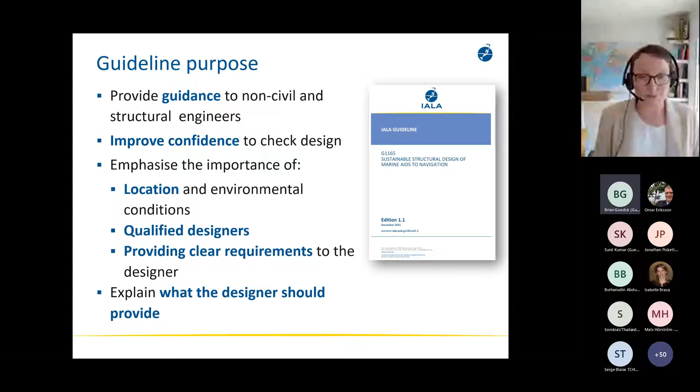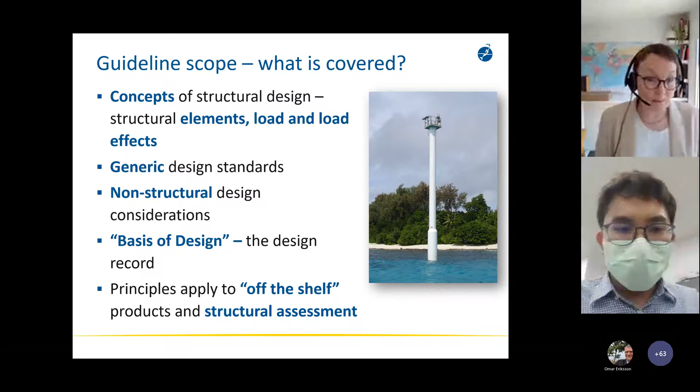And this principle of designing for the relevant environmental conditions applies also to the design of off-the-shelf products, such as, say, prefabricated beacons, as well as structures that require more specific bespoke design. So that's what's covered in the guideline.

What is not covered is detailed structural design calculations, as we've mentioned, because there are so many potential design calculations it would be impossible really to try and combine them into one document, and because they're regularly updated, that would be a really difficult thing to do.

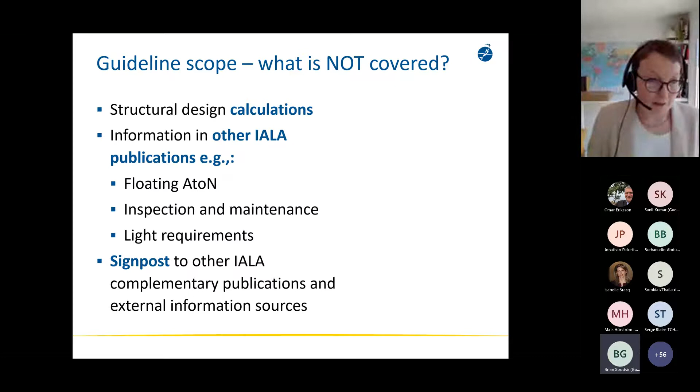So it doesn't include detailed design. It also doesn't include information that's more than adequately covered elsewhere in other excellent IALA publications - so it doesn't include floating Aton, inspection and maintenance, for example, or light requirements, because there are existing guidelines and recommendations that cover that.

What the document does do is act as a signpost to other IALA complementary publications and external information sources. It's also worth mentioning that there's another guideline developed by the IALA Engineering Committee, Working Group 2, led by Jorg, Peter and Mariano, on the effects of extreme environmental conditions on Aton equipment and structures. That document looks at the impact and potential solutions for the effect of heat, cold, water, and wind on the durability of Aton. This developing guideline and G1165 will ultimately complement one another very well, so look out for that over the next 18 months.

That was just my brief introduction to the background, the scope, and the purpose of the guidelines. So now I think what I'll do is hand over to Tiit to give some interesting examples of Estonian fixed Aton and his experience in managing those.

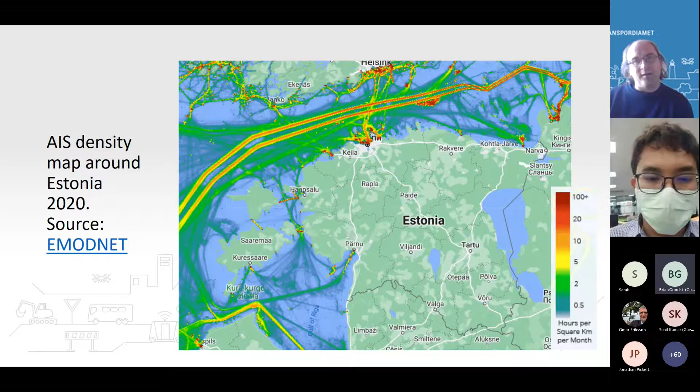Estonia is almost surrounded by the sea from all sides. There is additionally one big lake on the eastern side near Russia, which is also navigable. Naturally, we have quite a long maritime history, which starts with our own Vikings. We don't have knowledge of Atons from that area.

The history of Atons in Estonia starts considerably later and is reflected in our mix of different Atons. Nowadays, there are 321 fixed Atons in Estonia.

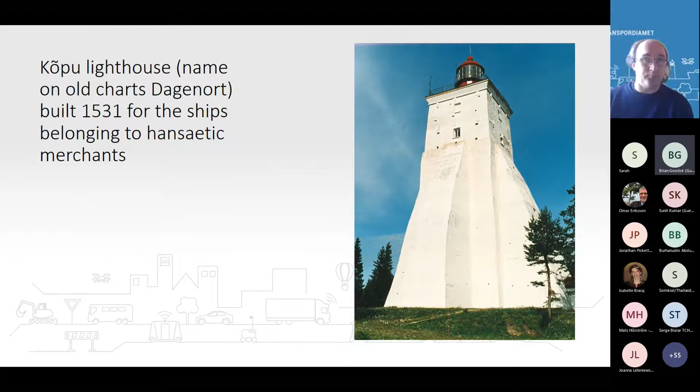The first hard evidence of the Atons is from the medieval period when Germans ruled us. Following Atons are from the time of Russian Tsars. Then the Estonian Republic emerged. Those are the Atons from the Estonian Republic, which was before World War II.

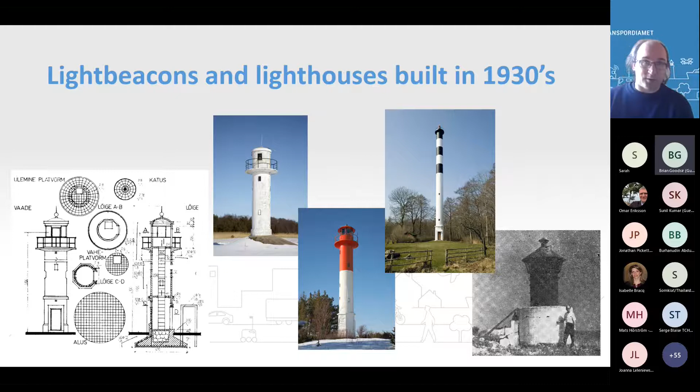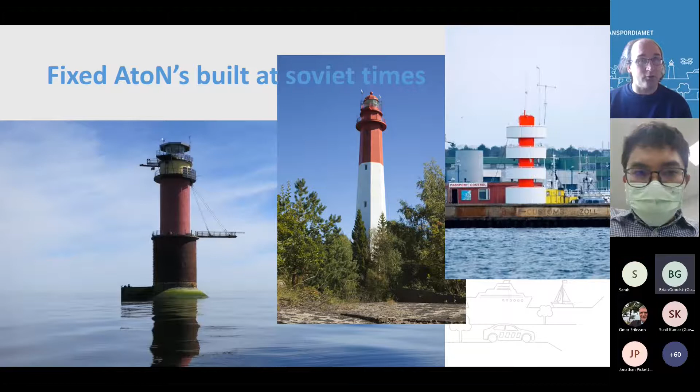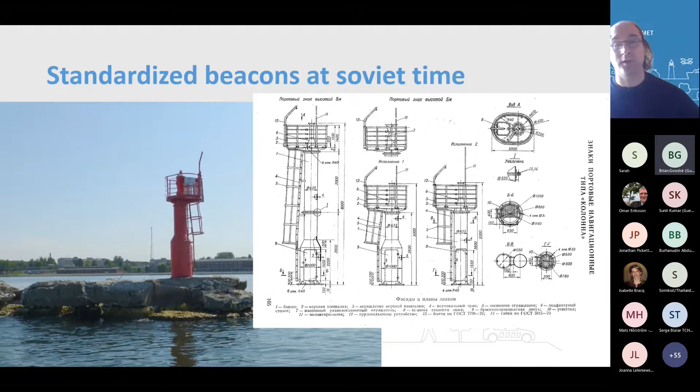At Soviet times, standardized fixed Atons emerged, like this, which was often used at the piers. Bigger ones were used in case of leading lines and as orientational marks. Some were quite big, reaching the height of 40 meters from the base.

Nowadays, we are mostly renovating old structures or building new ones when the cost of renovation would be too high and the structures don't have any historical value. Nowadays, we prefer constructions made of pipes because there are fewer places where water could collect and cause corrosion. Additionally, it is simpler to assemble the construction, weld and paint it.

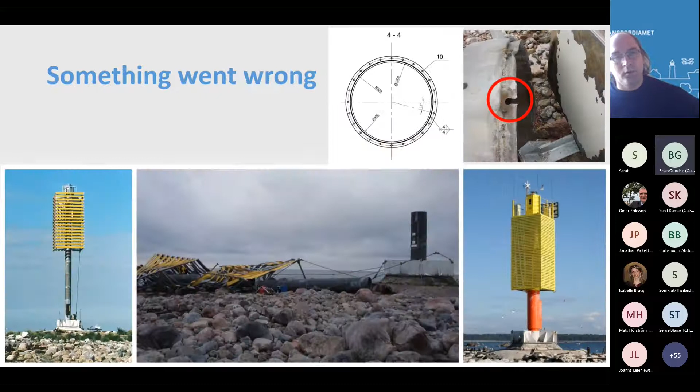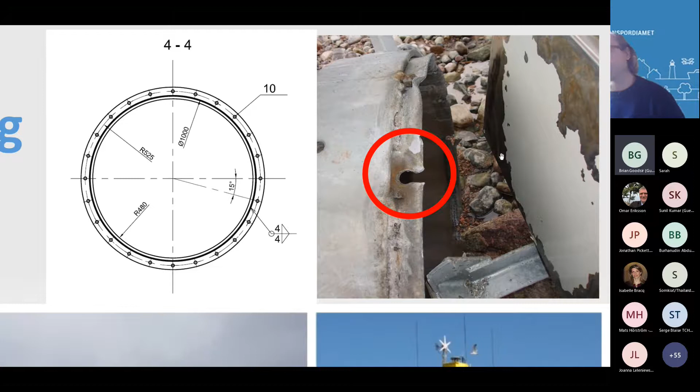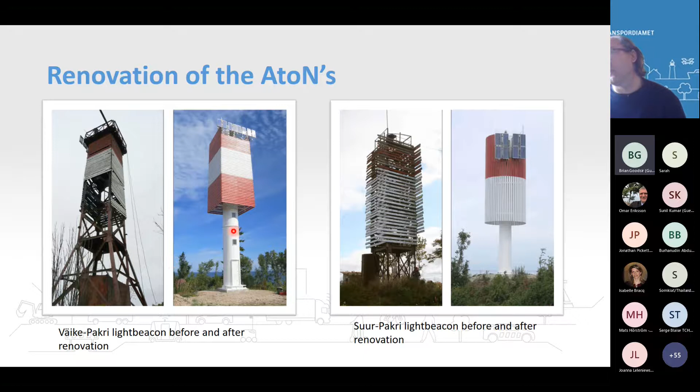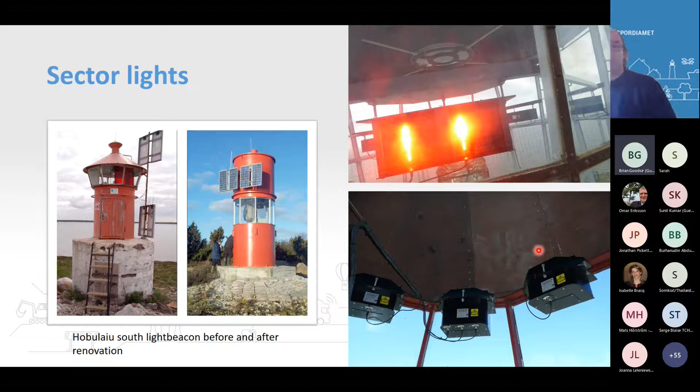Sector lights are quite complicated systems because care should be taken to avoid reflections at the lantern room. Old lantern rooms had tilted windows to avoid such a problem. Nowadays, we use sector lanterns, which consist of separate modules. Those pictures on the right side are from another lighthouse, but I hope you catch the idea.

At simpler cases, our own people are replacing dayboards. This mark is situated in the center of the town, Port Pärnu, and the dayboards are facing southwest direction.

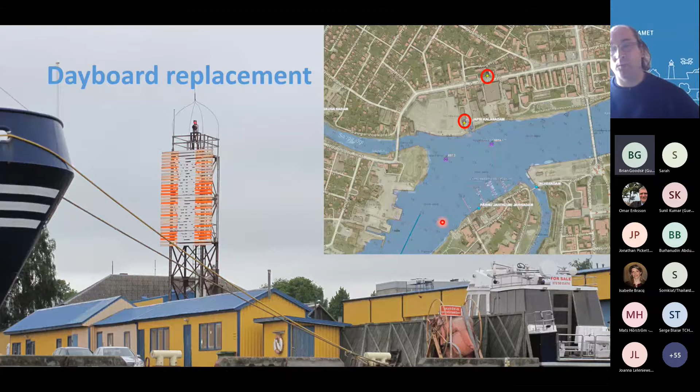The problem was that the color didn't last for a long time on those dayboards, so we decided to have a bit different approach, and instead of paint, we wanted to use some kind of film. The film needs a smooth base to make a good bond, and usually they are meant to be glued on metals.

We are having some marks with metal dayboards. Some painted, but in some cases the retro-reflecting film was used, like on the picture at the left. The film had been in place when we were thinking about using film on that mark already for 13 years.

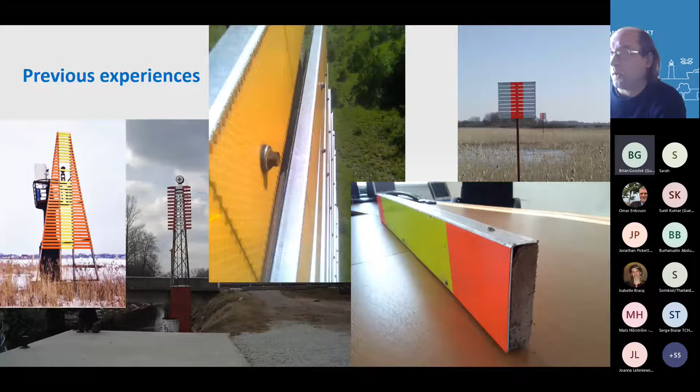Differently from previous experience, as shown on the picture right bottom, we decided to use a rectangular profile, aluminium profile. Here is aluminium, painted aluminium and wood used. But this wood didn't last so long.

Soon we discovered that the aluminium is quite light and easy to use. The drawback was that the designing and preparation process needed to be quite long because we had to carefully measure the construction in order to prepare all the boards.

At the site we only had to bolt the boards. This dayboard, which you see on the picture, took us a bit more than half a day to put in place.

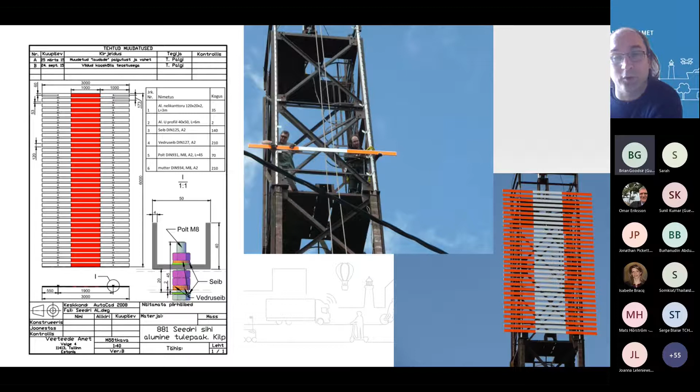As it turned out that this kind of aluminium construction is quite easy to handle with just manpower, we decided to build one two times bigger. In this left picture, you can see bolts attached on the vertical bar of the dayboard. When we assembled this board, we lifted it up on the tower, and then we just had to bolt everything else.

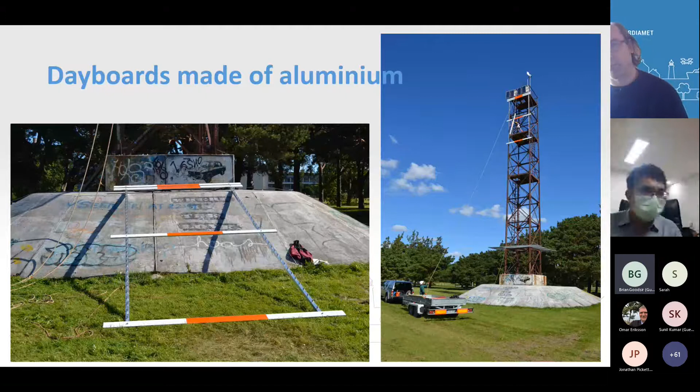Here is shown the front mark before and after renovation of the day board.

That's all from me, thank you for listening. This is my usual work. You can see me in the yellow costume measuring the position of the Aton. Thank you.

Thank you, that's fabulous and really interesting to see how you select the materials and change the design to make your Aton more durable.

So what I'll do now, if I can share my screen again, is just briefly talk through the content of G1165. I'll just talk through the main sections.

Section 4 is the first main section in the document, and that provides a summary in figure 1 of the typical design process. That includes the stages as you work through a typical fixed Aton design, starting with the Aton manager's requirements, such as the focal height of the light, the design life, the materials. It then moves on to look at the design codes that are used.

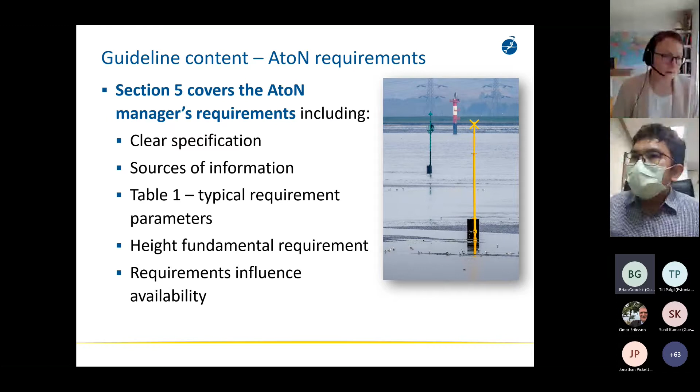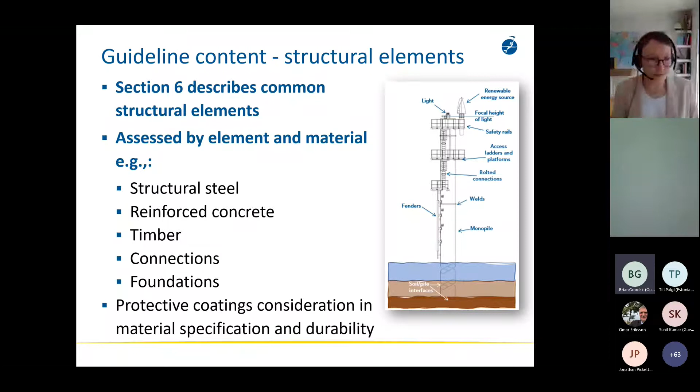Section 6 looks at typical elements of fixed Aton structures that might require design irrespective of the location. Elements are typically assessed on a combination of the part they play in the structural integrity and the material that they're made of—for example, structural steel, reinforced concrete, foundations. The document also talks about how protective coatings are an important consideration when deciding on materials and in the design specification.

Section 6 continues with describing typical loads experienced by fixed Aton, and then section 7 looks at globally generic design standards. Whichever region of the world you're in, there is usually a design standard based on these generic areas of design, such as the principles of design, loading, structural steelwork, piling, timber, etc.

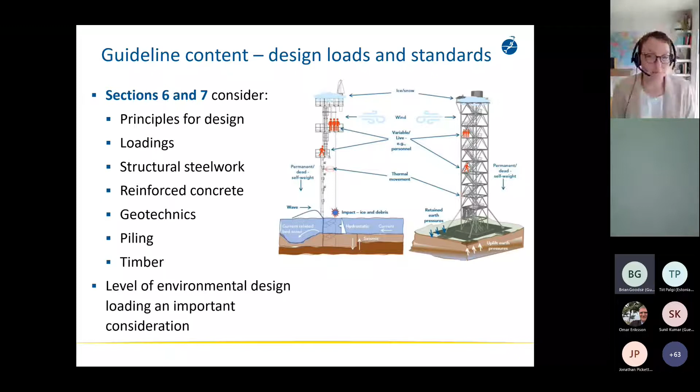The design standards also apply to the assessment of existing structures. Something the document stresses is the importance of considering the concept of annual exceedance probability, which you can read more about in the document—it's a way of describing the level of environmental conditions we want the structure to withstand, as that will affect the cost and the probability of the structure failing or not.

Section 8 briefly covers additional design considerations that can influence the preferred design option, such as durability—the deterioration of material can lead to a loss of load-bearing capacity, for example. It considers sustainability, the whole life cost approach—do we want to design for an average year weather-wise or an extreme year? Is it more cost effective longer term to build a more robust structure rather than risk replacing a cheaper structure once or even twice over the same design life?

The document looks at waste reduction and waste management through the design. It considers stakeholder requirements because they can also influence access and operation—can the structure be accessed and maintained safely? And similarly, how does the design allow or minimize the potential for trespassing, theft and vandalism?

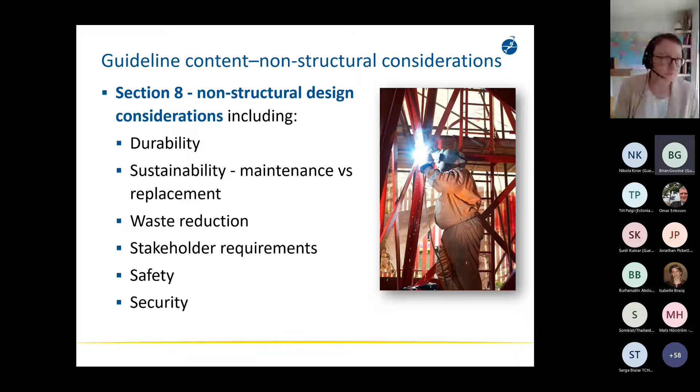Finally, section 9 briefly describes the potential design output that the Aton manager might receive from the designer. That might be specifications and drawings that a contractor or supplier can use to provide the Aton, along with operational manuals to help through the operation of the structure.

There might also be a designer's risk assessment, and there should be a basis of design summary document. That document summarizes what the original requirements were, and what additional standards, references, design parameters and values the designer has used when designing the Aton.

That document is a great opportunity for the Aton manager to check and compare what the design has provided with the original requirements, and also to challenge the designer if items are missing, perhaps using G1165 to help. An example basis of design document is provided in Appendix 1 of the guideline.

So that was a very quick summary of the guideline content, but it basically covers providing the Aton manager or professional with a basic level of understanding about the structural principles of Aton design, the typical design process, and the documents they may expect to receive from the designer.

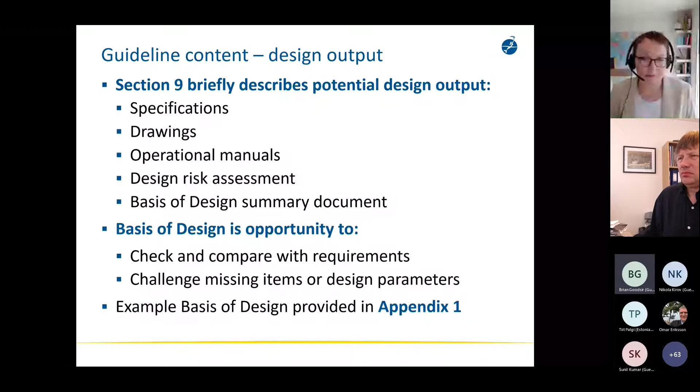Thanks, Sarah. I'll try and share my screen. Can you see that? Yeah, we can see it. Yep, okay. Good evening or good morning, everybody, depends what part of the world you're in.

So I'm going to give a quick presentation with lots of photos based on some case studies on structure replacements. I'm going to cover two different case studies, both from Papua New Guinea. One is for a place called Strathord Island, and another for a location called Delman Front Lead.

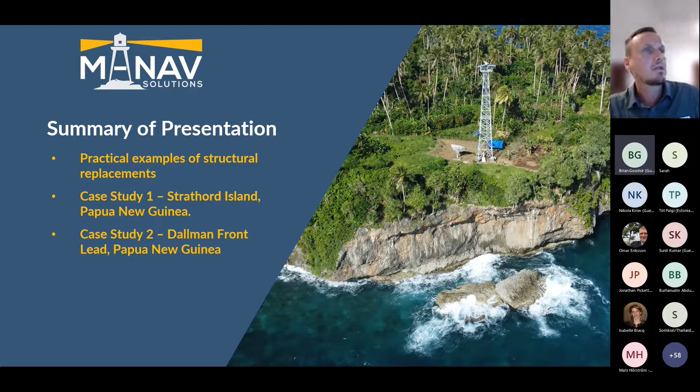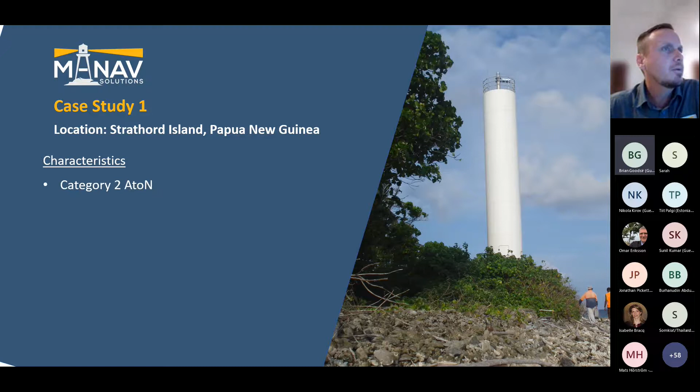So the first case study is on a location called Strathord Island, which is in Papua New Guinea, in the Pacific. This particular site, you can see in the photo on the right. This was a Category 2 AtoN.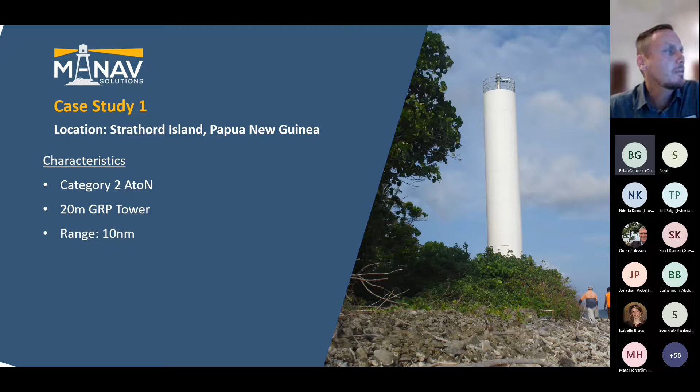The original structure was a 20-metre GRP tower with a 10 nautical mile range. This marks the northern tip of a group of uninhabited islands directly adjacent to one of the main international shipping channels running through PNG coastal waters just north of the Jomard entrance. So the majority of international vessel traffic passes fairly close to these islands.

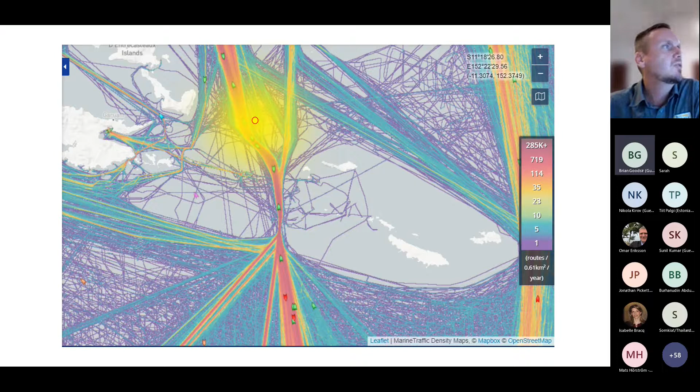So the initial structure was installed in 2005, done to replace an old steel lattice tower that had been there for about 20 years and had deteriorated until collapse. At the time of this job, I was working on the contractor's side, and this particular structure was specified in the contract documentation.

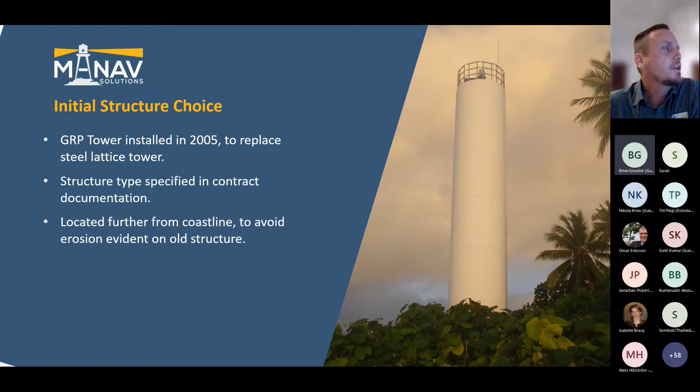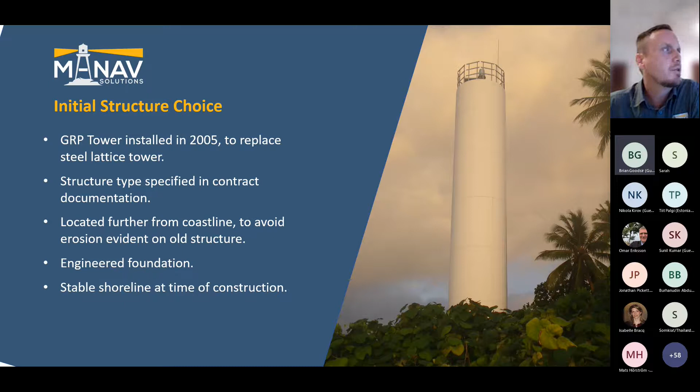It was located as far away from the coastline as we could to avoid the erosion that was evident on the old structure, whose foundation could be seen on the beach. It was quite a big engineered concrete foundation, and at the time we installed it, it was quite a stable shoreline with probably about 20 metres to the coastline.

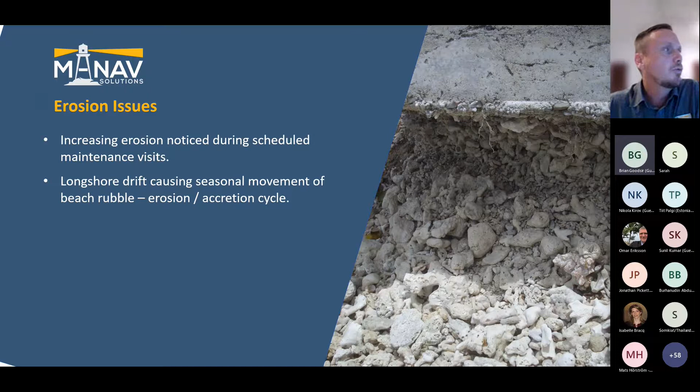Probably about 5 or 6 years after, we started to notice increasing erosion. There was a 6-month scheduled visit to each of these sites, and it was quite evident this was caused by longshore drift, the seasonal movement of beach rubble and that erosion and accretion cycle. So the beach was going back and forth, building up and eroding during the natural cycle.

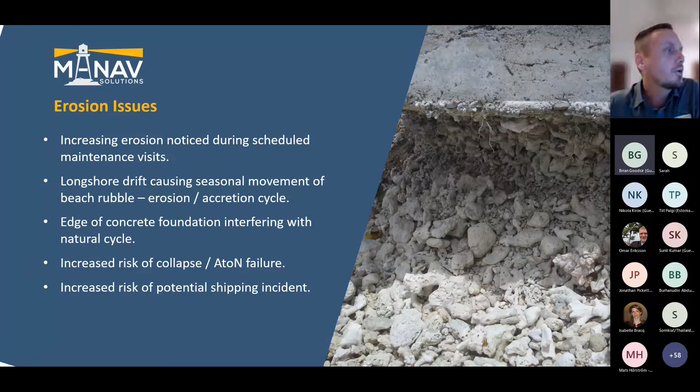But what we noticed happening was that the edge of that concrete foundation started interfering with that natural cycle. So as the beach eroded at a certain time of year, the concrete foundation was causing issues. It got to the point where we were noticing increased risk of collapse or failure, which of course increases the risk of potential shipping incidents due to its location.

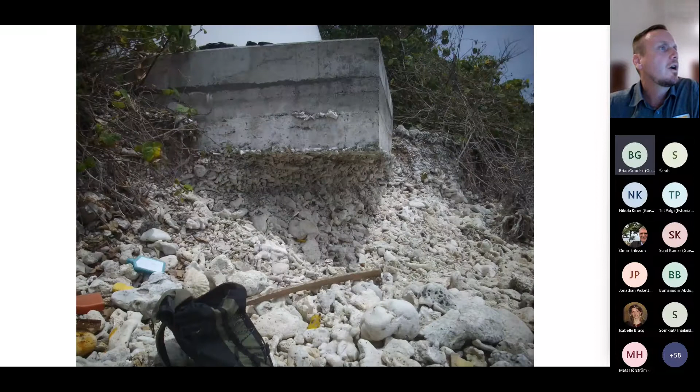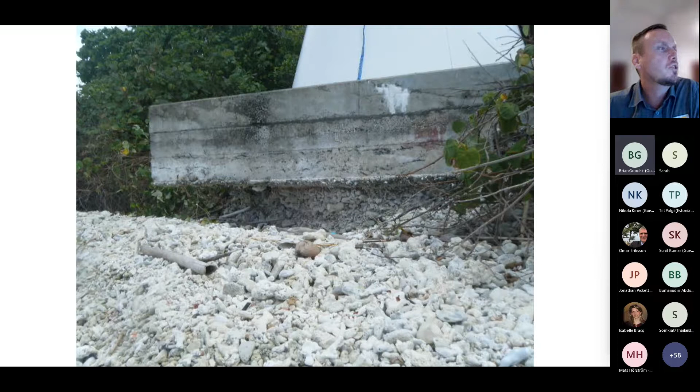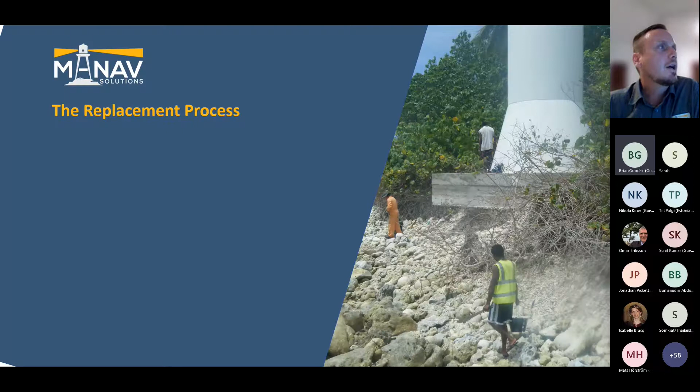You can start seeing how severe that erosion was getting. This was just natural longshore drift, but that concrete foundation was causing issues with the beach hydrology. You can see eventually it got to the point where that foundation was getting ready to collapse, so we were asked to go through the replacement process because the level of risk of failure was deemed too high. You can see that in the photo on the right.

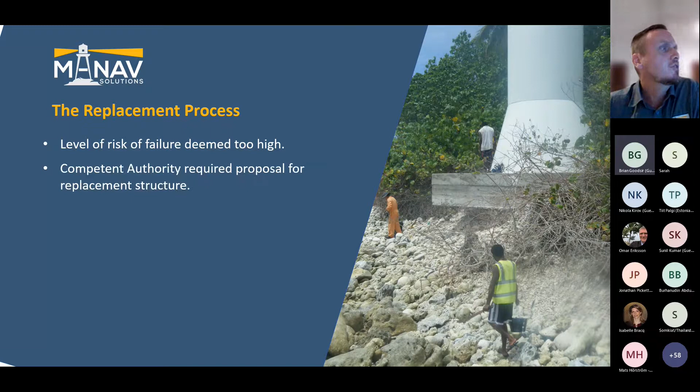The NMSA required a proposal for a replacement structure, and they wanted the lessons learnt applied so as not to make the same mistake of an onshore structure in the wrong position. We didn't have time to do a detailed longshore drift study, so it was not possible at that stage to predict the future sediment movement and shoreline changes, especially with that foundation now there on site.

So it required, and this is part of this new guideline, as Sarah said earlier, a balance of cost and assured reliability and availability. So we had to look at it from several angles.

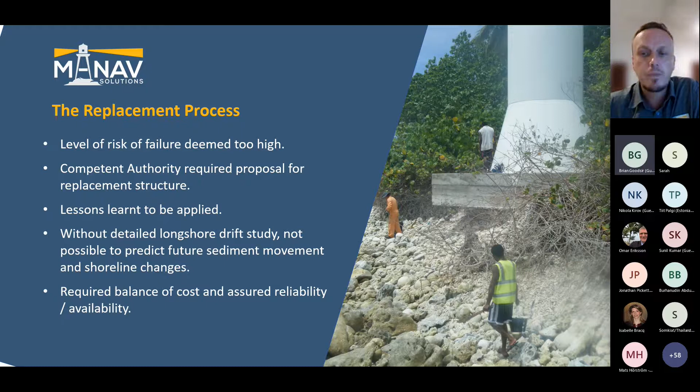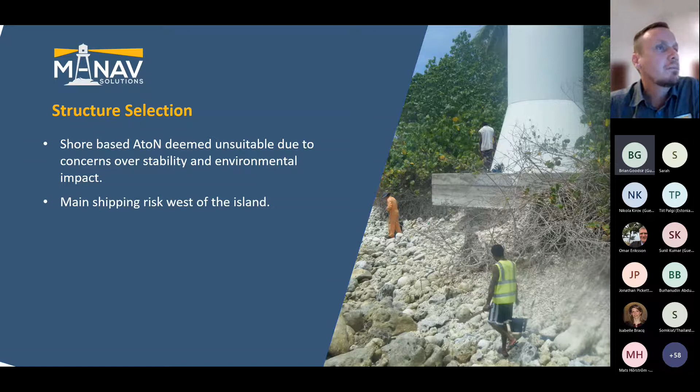When we started looking at structure selection, we automatically deemed that a shore-based AtoN was not going to be suitable, due to concerns over beach stability and ongoing environmental impact of having these concrete foundations in situ. The main shipping risk, the main hazard this was marking, was the shipping channel west of the island.

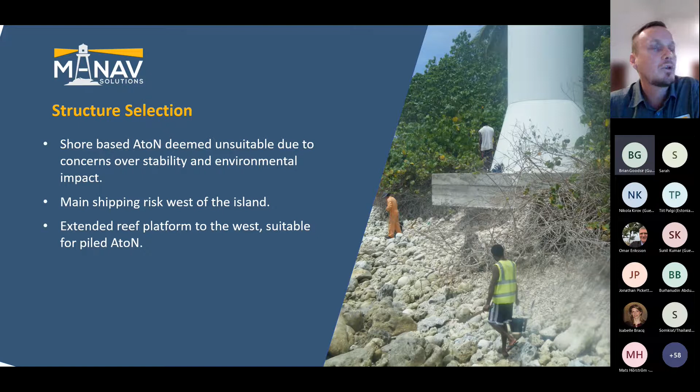When we looked at the surveys, there was an extended reef platform to the west, which was of a suitable depth to install a fixed piled AtoN. We had some concerns over the focal height and its impact on range, so we did a quick geographical range analysis to confirm the suitability, and we were going to get the range at the height we could achieve with the piled AtoN, which worked out okay.

There was a slight change in the arc of visibility due to the island obstructing the light to the east, but there's very little shipping to the east of the island, so that was also deemed acceptable.

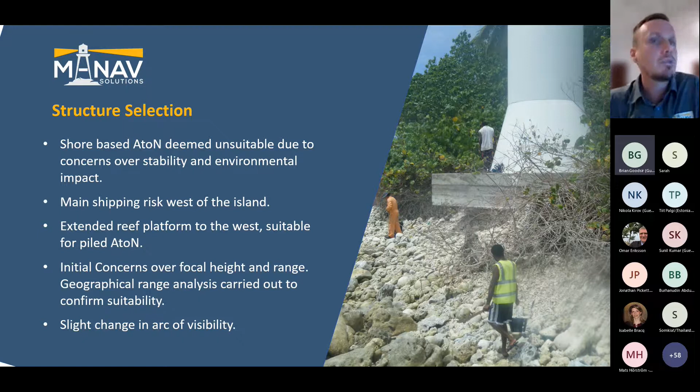We undertook a design review process and considered all of the conditions. Sarah mentioned quite a few of these when she introduced the guideline. We took into account the wind loads, waves, currents, depths, the corrosion loss in the pile column, and the ultimate bending moment, and these were all used to come up with the correct specifications for that particular structure.

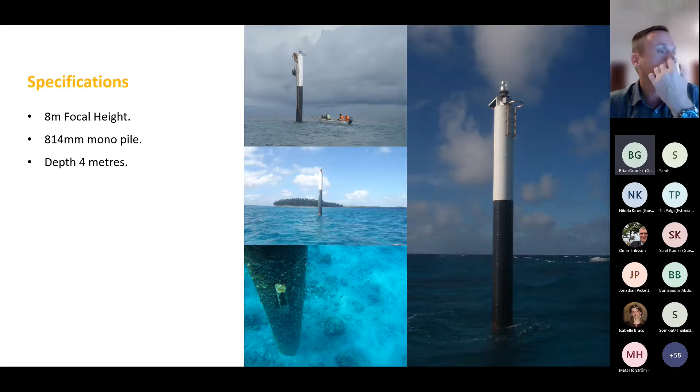In the end, we were able to achieve an 8-metre focal height, which was a lot less than what we were achieving on the island, but was still sufficient to achieve the range we needed for the shipping channel. It was an 814mm monopile, in quite exposed conditions, so it had to be a sizable pile column. These were driven in 4 metres of water depth with 8 metres of seabed penetration.

We were able to apply quite a few different corrosion protection systems. We had sacrificial anodes, you can see one in that bottom left-hand photo. We had a Denso system and a marine epoxy coating on the steel pile. We were also able to use marine-grade stainless steel fittings on everything that was exposed, including the driving tongue, the ladders, and the fittings for the lantern and solar panels.

The design life of this structure is 30 years. Of course you have some maintenance on things like the Denso and a bit of touch-up painting, but they're quite a durable structure. The other thing with these structures is they have minimal environmental impact, and we actually found them over time to be habitat enhancing, because as you can see in that bottom photo, being a fixed pile in the seabed, they actually encourage marine growth.

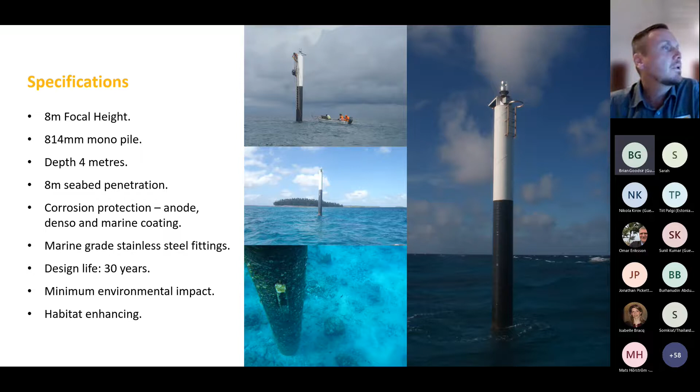So that was case study 1. Case study 2 is similar but different. This is on a site called the Delman Front Lead, again in Papua New Guinea.

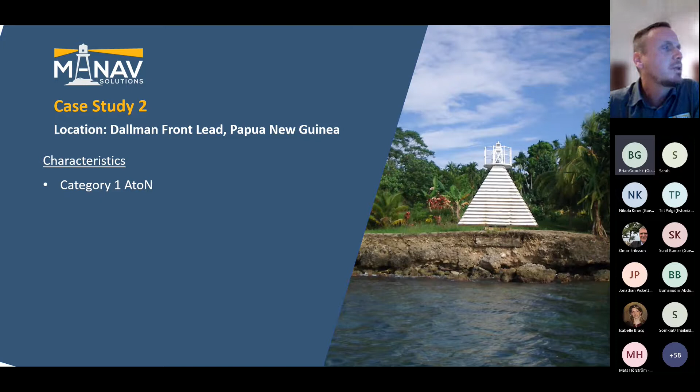This was a category 1 AtoN. There were probably only about 10 of them in Papua New Guinea at that time, so only a handful deemed to be vital. This was a steel structure on a concrete foundation with a daymark board. The photo there is the front lead, and the rear lead is back amongst the palm trees.

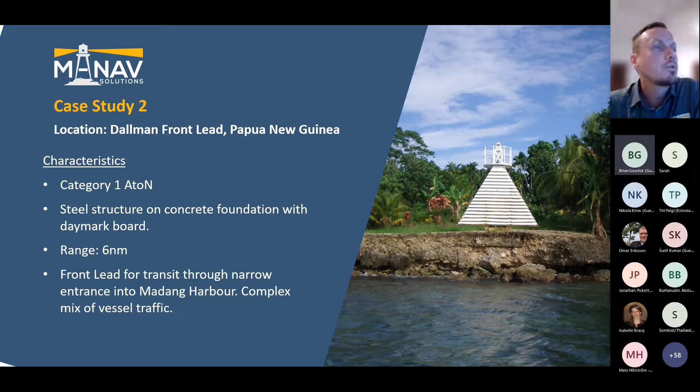This had a range of 6 nautical miles, and it was used to mark transit through a very narrow entrance into a place called Madang Harbour, which had a complex mix of vessel traffic, anywhere from fuel tankers to coastal traders, tourist vessels and small craft.

So the issue we had on this site, and this was a much older site, about 15 years old, we noticed increased erosion during scheduled maintenance visits. This was quite different to the other site - it wasn't caused by Longshore Drift. This was a quite stable coastline, but wind and wave action, exposed nature of the shoreline, it was just washing away.

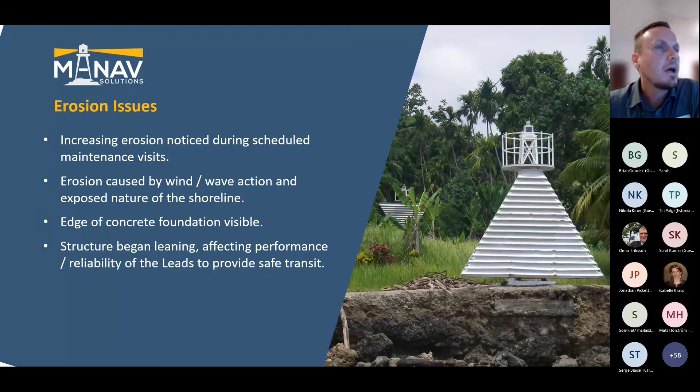There was also a lot of propeller wash and wash from passing small craft. The edge of the concrete foundation eventually became visible, and eventually it got to the point where the structure started leaning, which was affecting the performance and reliability of those leads to provide safe transit. As that front lead dipped, it was impacting how mariners could view those leads in their transit. There was an increased risk of structural failure and shipping incidents.

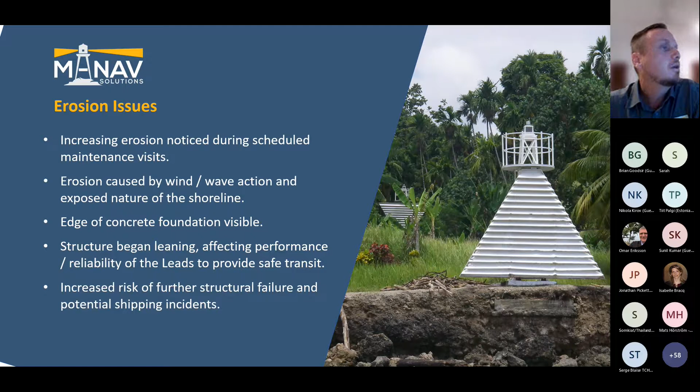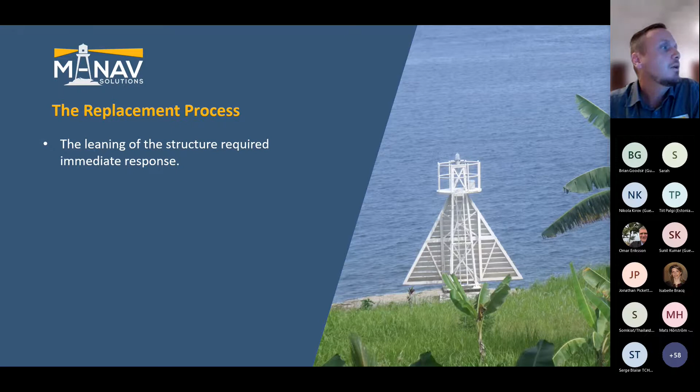So the leaning of the structure required an immediate response because it was a Category 1 Aton, marking a very important entrance. There was very limited space available between the rear and the front lead for repositioning. There was also a lot of local landowner issues, which anybody listening here from the Pacific will understand, but there were issues to secure land for the new site.

It was possible to stabilise the shoreline, but it was prohibitively costly. It would have been quite an expensive construction job to stabilise that shoreline properly, which just wasn't worth it. There was also an extended reef platform in front of this site, extending about 30 metres, which had also caused some incidents for small craft passing into town past the site.

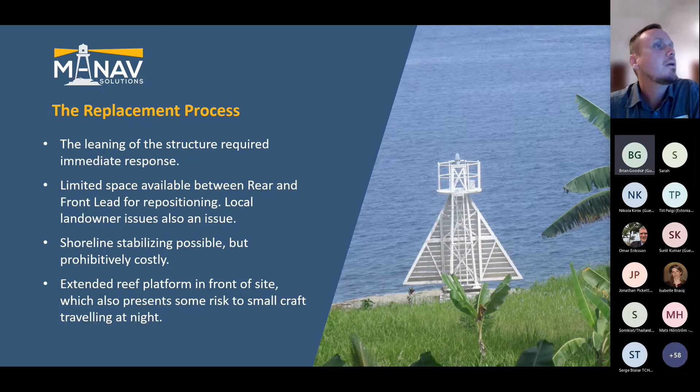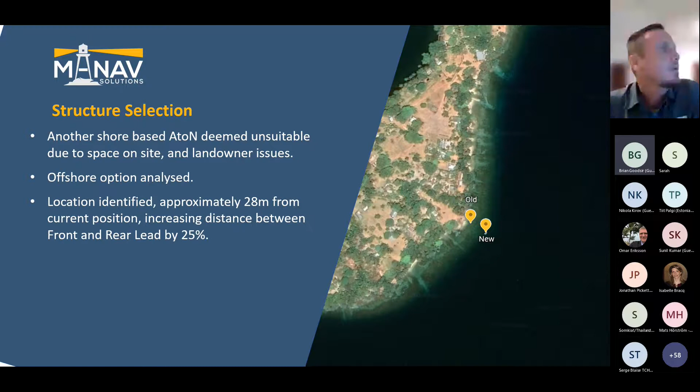So on analysis of all those factors, we deemed that shore-based Aton was unsuitable due to the space on site and access to the land. We looked at moving it onto the edge of the reef platform, which you can see there. We located and identified a location approximately 28 metres from the current position. That increased the distance between the front and rear lead by 25%.

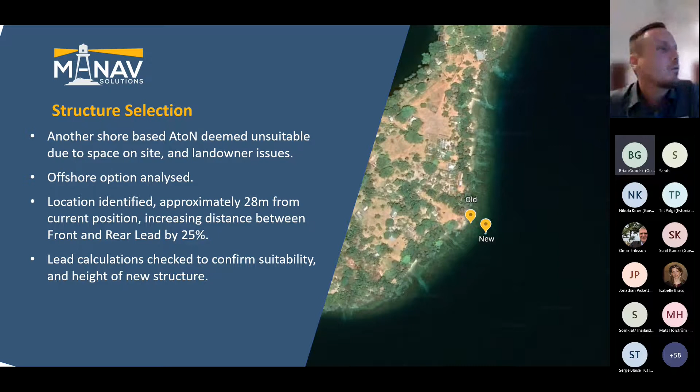So we carried out some lead calculations just to confirm it was still suitable and to confirm the height of the new structure. After our calculations, we identified there was no change to the performance of the transit, but it also helped to mark a hazard for small craft passing the site. When I say small craft, I mean small outboard-driven dinghy motors that can go quite shallow.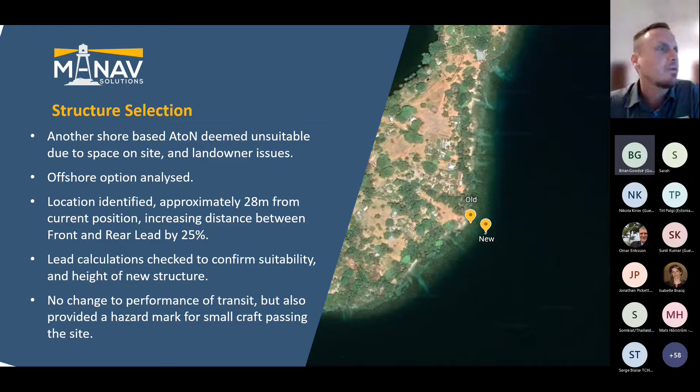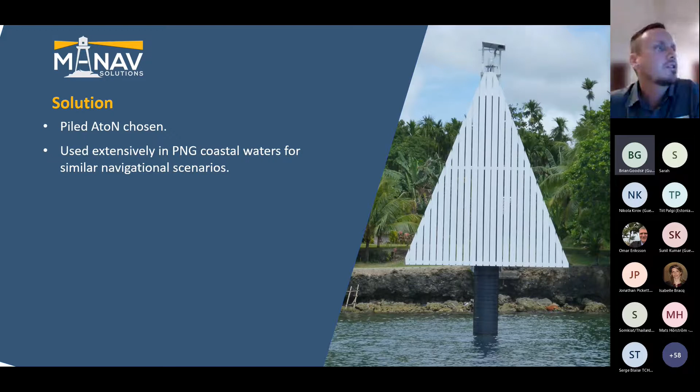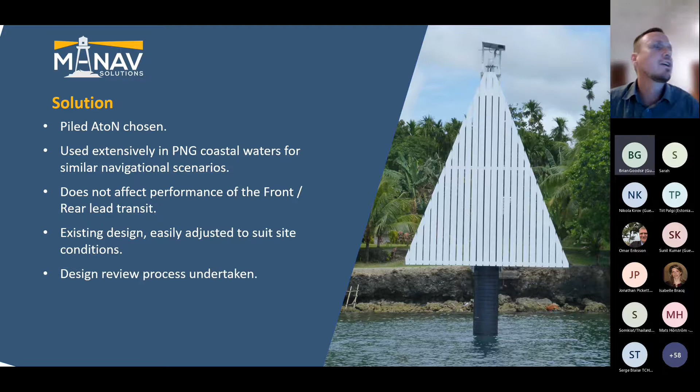So in the end, again, we moved to a piled Aton. As I said, it was used extensively in coastal waters in PNG for similar scenarios. It doesn't affect the performance of the front or rear lead because we can basically get whatever height we needed. Existing design, easily adjusted to suit site conditions. As I said in the last case study, we did the same review process: wind loads, waves, currents, depths, looked at corrosion loss and the ultimate bending moment to pick the monopole.

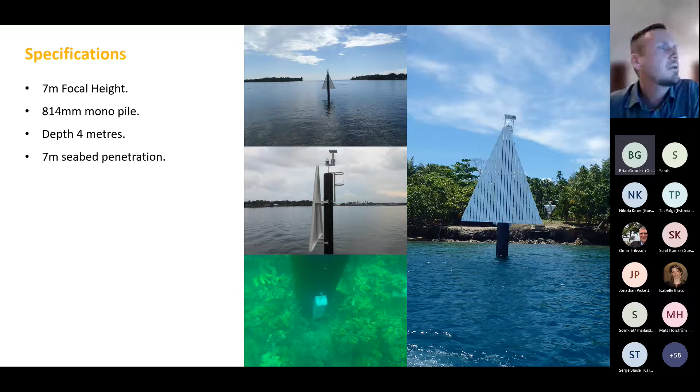We went with a 7-metre focal height, which matched the old structure. Again, an 814mm monopole, depth of 4 metres, 7-metre seabed penetration. We had the same corrosion protection as case study 1. We utilised stainless steel for all fittings, including the Daymark board.

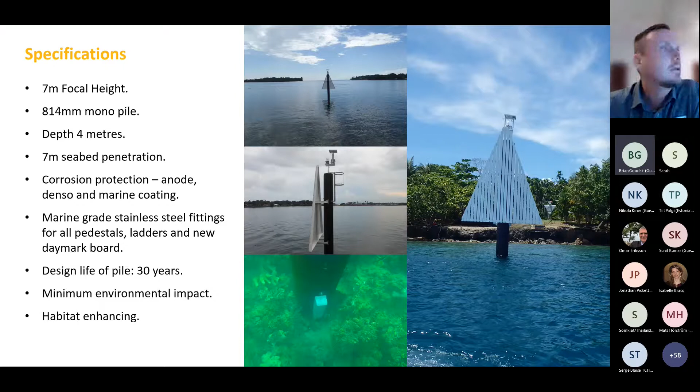Again, design life of pile of 30 years, and you can see the photo on the left - that was as installed straight into a coral reef. We have all the environmental protections for the process, but you can see very little environmental impact over the lifespan of the structure. And that is a photo looking back from the shoreline straight out the entrance.

And that is the end of my presentation. Hope you enjoyed. Thank you.

Thanks very much, Adam. It's so interesting how those case studies demonstrate the balance you have to achieve of the design considerations, like Aton function, durability, navigational risk, and the environment. They're really interesting. Thank you.

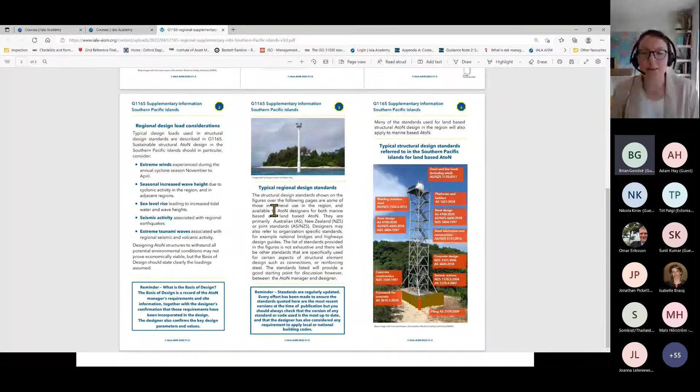...discusses and provides particular regional environmental loads. So as well as the standard loads of the dead weight of the structure or the live weight of personnel walking on the structure, there is this third category of environmental loads, and this information provides more guidance on the kinds of environmental loads that might be experienced in the region. For example, seasonal increased wave height or seismic activity.

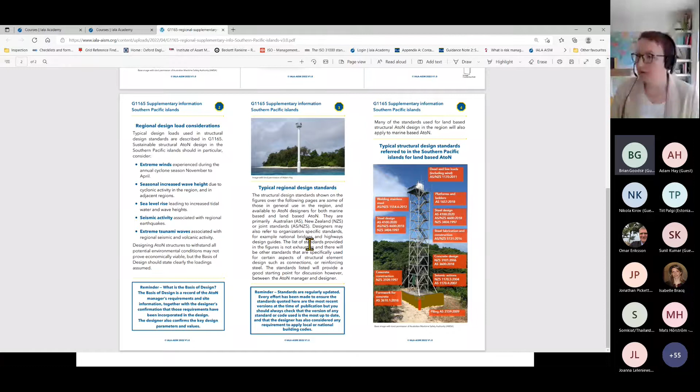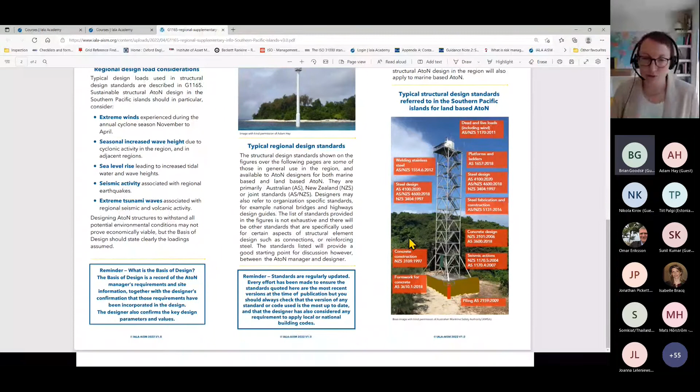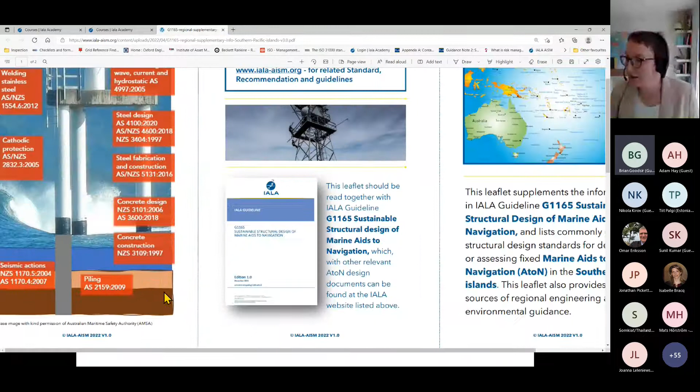Then on page 3, we go on to talk about typical regional design standards. Let me see if I can zoom in a little bit. We've produced two diagrams, one a terrestrial or land-based typical Aton design, and one for marine-based Aton. What that does is give further detail on the typical specific design codes that might be used for the design of Aton in this particular region.

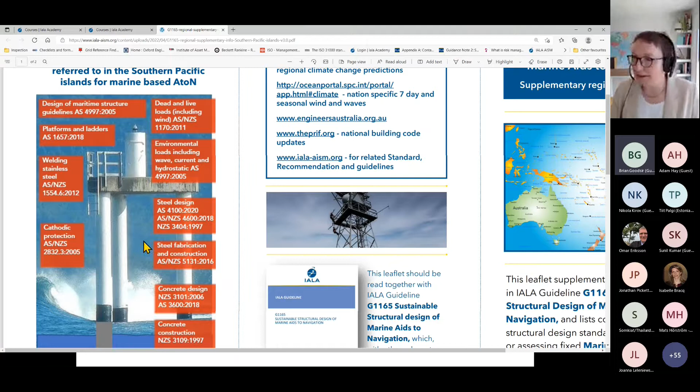So for example, for the dead and live loads, including wind, the joint Australian-New Zealand standard 1170 would be used. For steel fabrication and construction, the joint standard 5131 would be used. So that is just to try and put a bit more detail for regions on the kinds of standards that might be used in design, and for the Southern Pacific region, you'll see they tend to be either Australian or New Zealand design codes.

So the leaflet covers the specific typical design standards used, and also provides a bit more information on useful regional information sources. This Pacific Climate Futures website is about regional climate change predictions and how design should incorporate the potential for changes in the environmental loadings that AtoN might be subject to. So this is the guide, the pamphlet for the Southern Pacific Islands.

The next one we're hoping to produce is for the Caribbean region, with assistance from our colleague Julio Fidel in Cuba, who's provided a lot of really helpful information. That draft will come in the next month or so. If anybody dialing in today is from the Caribbean region and feels they might be able to contribute to producing similar diagrams for the Caribbean region, that would be great to have your assistance. And then please also let us know where else in the world we should produce a leaflet for.

So we're currently considering the cyclonic zones of the Indian Ocean, perhaps the Western Pacific, Southeast Asia, but please let the Worldwide Academy know where you think it would be most useful to have this more specific regional design information. Also, hot off the press, Minsu forwarded me this document recently published by PIANC that considers the effects of climate change on port infrastructure. That's quite recently published guidance, so there might be some really useful information there that you could use to complement G1165 when considering sustainable design.

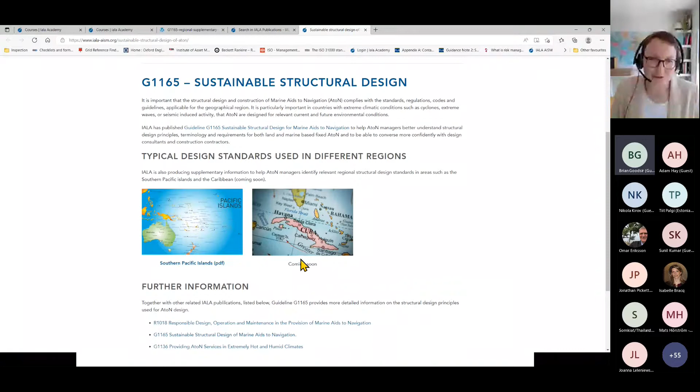So that's here, publications, search in publications, and you can just look for G1165 there, like you can for any document. And then the supplementary regional information has been given its own web page, under the IALA website, topical matters. So this is this section here, and down at the bottom is the G1165 supplement, which is the holding page for a link to G1165, and then also the PDF leaflets that I just showed you. So here we have the Southern Pacific Islands, and we also have coming soon the comparative one for the Caribbean region. So that's just to help you navigate your way around where to find that information.